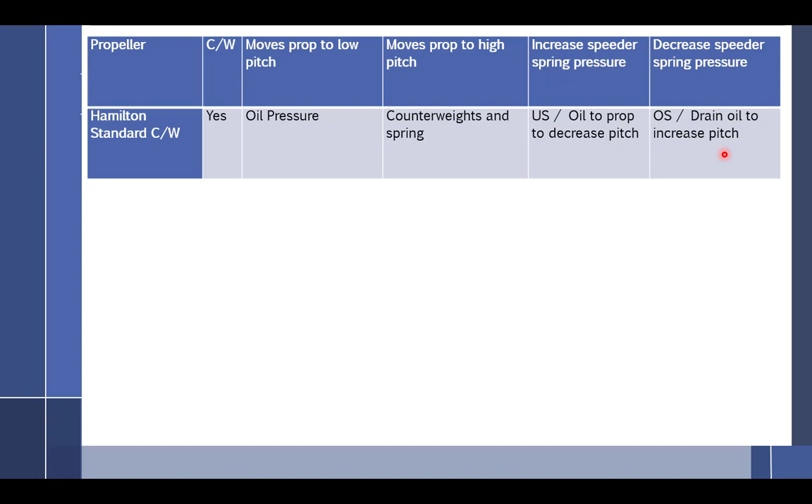All right, next prop we're going to talk about is the McCauley propeller. We're going to talk a lot about different propellers. And I don't really think under any circumstance am I going to ask you something so specific about the McCauley prop did this, where the Hartzell did that. It's mostly going to be a lot of the same.

Does this one have counterweights? No. Doesn't have counterweights. So if it doesn't have counterweights, it's probably going to go on what kind of engine? It's going to go on a single. The fixed force is going to be centrifugal twisting force, and that's going to make the blades go to low pitch. And what is going to make it go to high blade angle? High oil pressure.

We could probably just call it a night, couldn't we? Yeah. All right. You are going to call this out, right? Yeah, but it's going to kind of go through all those until we get all the way down here to that. So there's quite a few. So that's up to you. All right. So there's the inside of it. Are you going to ask about the different hub designs? A little bit, yeah. What he's trying to do is figure out if he can get away with not having to read a bunch of stuff here for his oral, huh?

All right, so here's the inner workings of it. We have bearings along here because we have a lot of force trying to move this propeller out and ripping it out of the hub. What force is that? Centrifugal force. It's a little difficult to see here, but you can see the orange line. The outside, that is the piston dome on top. And inside of it, we have a piston that's going to go back and forth. And as that piston goes back and forth, it's going to be pushing on these phenolic blocks.

Anybody know what phenolic is? Phenolic is something you see a lot in aviation. It's an insulator. It's fibrous, almost like wood, but stronger than wood in some respects. But it's similar to a plastic, if you will. So why all of this metal, and then they put these two plastic pieces in here? When you are actually working with this propeller out in the lab, you will notice that these plastic pieces are in fact broken. So I don't know why it wasn't made out of aluminum. Nobody asked me.

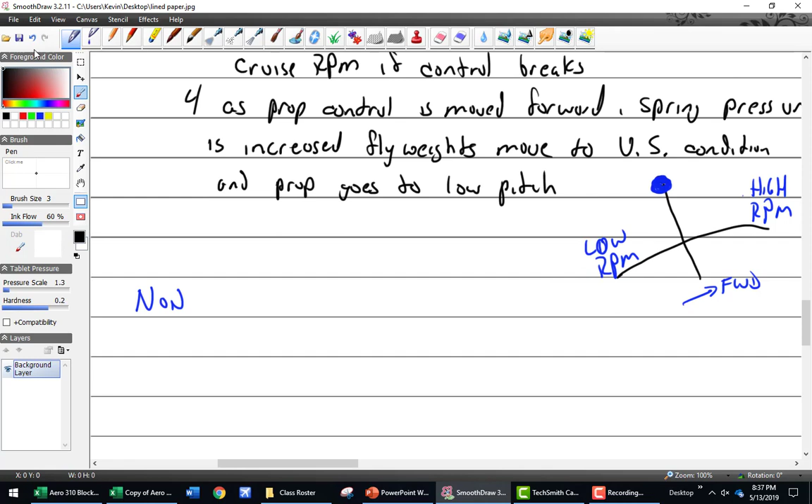All right, so where are we at? 3. I'm going to put a header up here because right now we're going to be talking about non-counterweight, non-feathering props. All right, so everything we're going to talk about until I say otherwise is that.

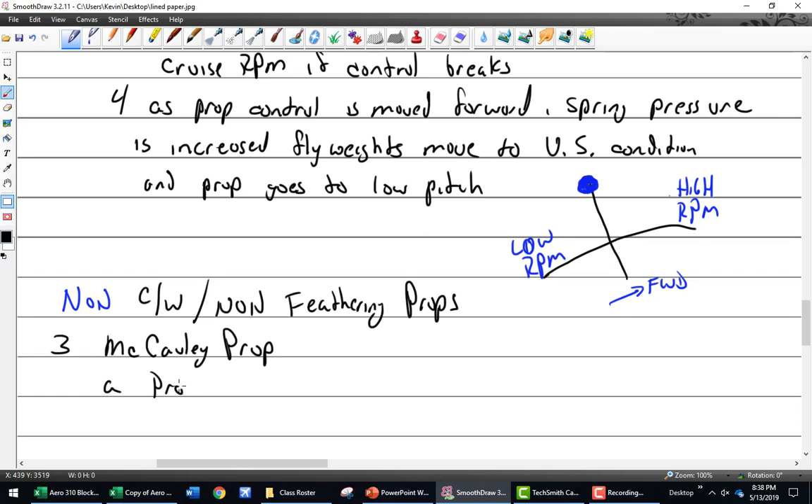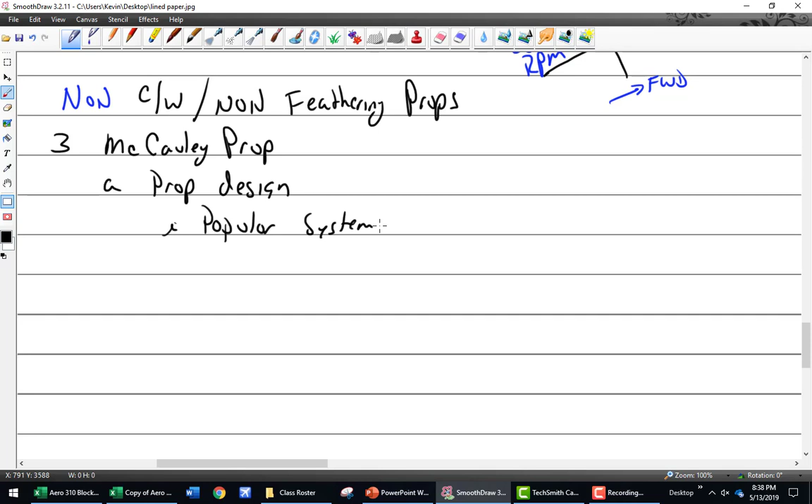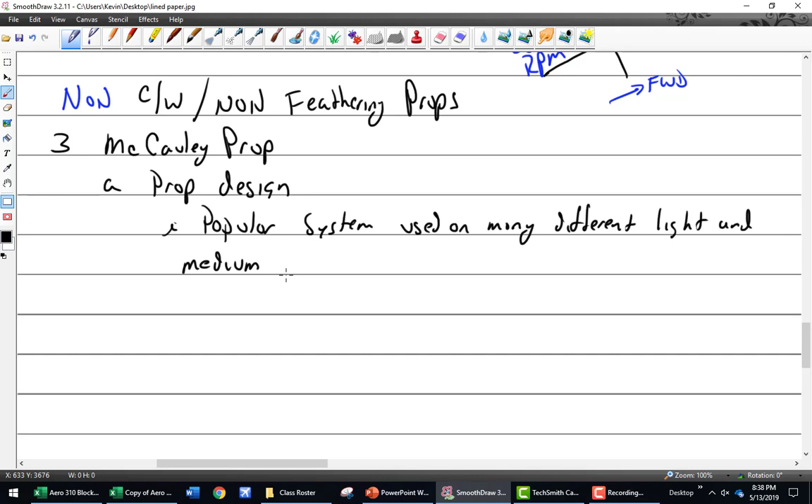This is where it starts to get, for me, scary when you start thinking about buying an aircraft. You can see aircraft for sale, and Tyler can probably speak to this one even better than I can. You can see 2 aircraft that are nearly identical, and the price difference is just off the chart one way and off the chart the other way. And like, why? Why are they so different? A lot of it has to do with radios and instrumentation, but then other things come into play like time since overhaul and then what kind of propeller it has on it, because these things are so dang expensive. So 2 different types.

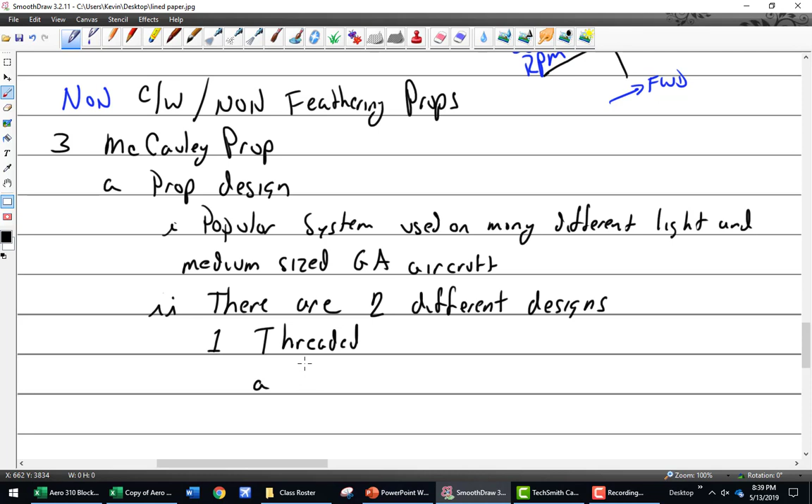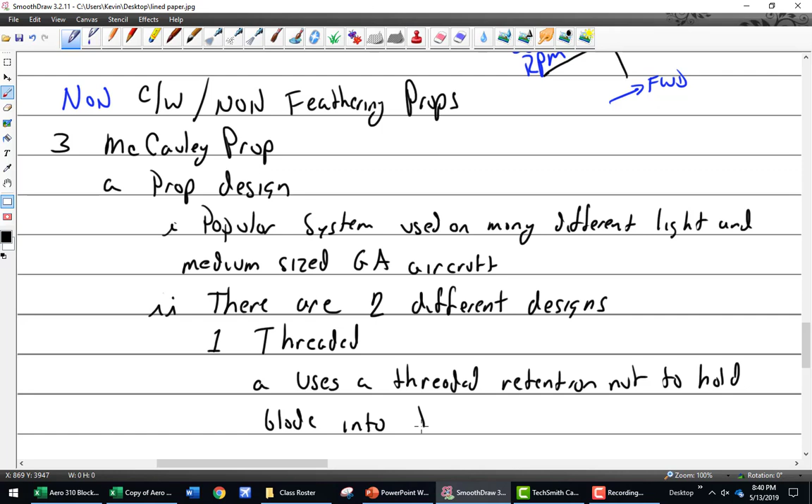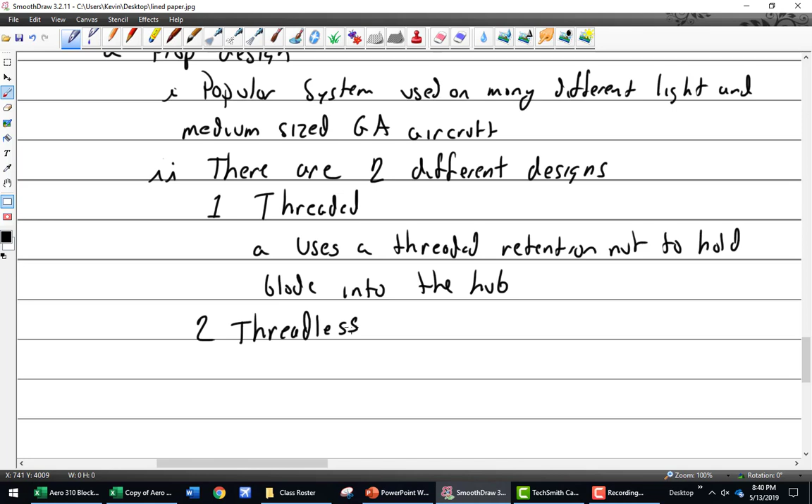There's the threaded type. And the threaded uses a threaded retention nut to hold the blade into the hub. And the other type is the threadless. This is the modern design, with a higher TBO. What's TBO mean? Time between overhaul. And it uses split retainers to hold the blade into the hub.

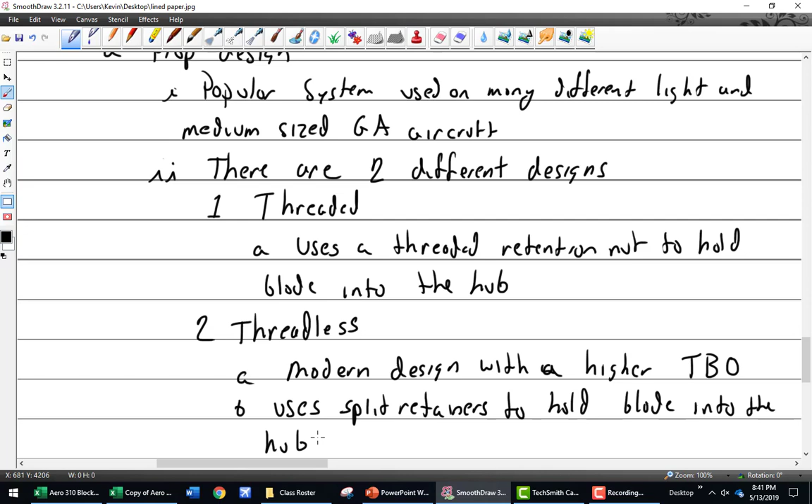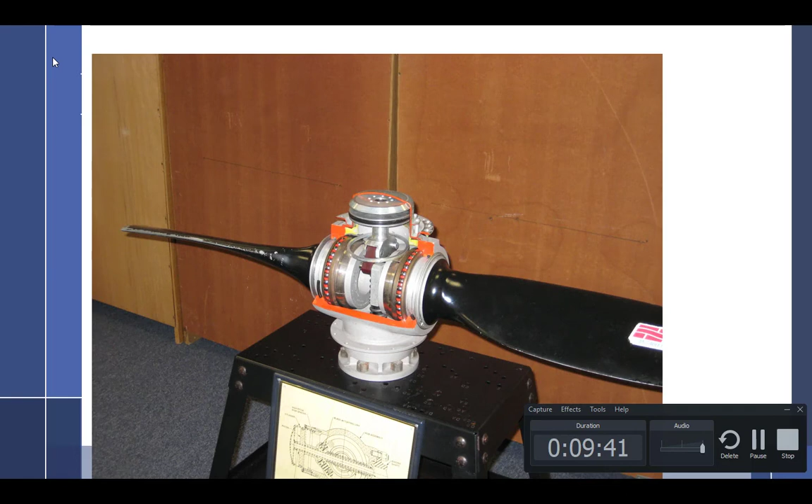Well, let's see if we can take a look. Oops, wrong button. Run current slide. Well, let me see. What do we got here? Well, I see a split retainer, a retaining ring in there. And I don't see any threads at all. So that would tell me that's the modern threadless. All right, let's go back a slide.

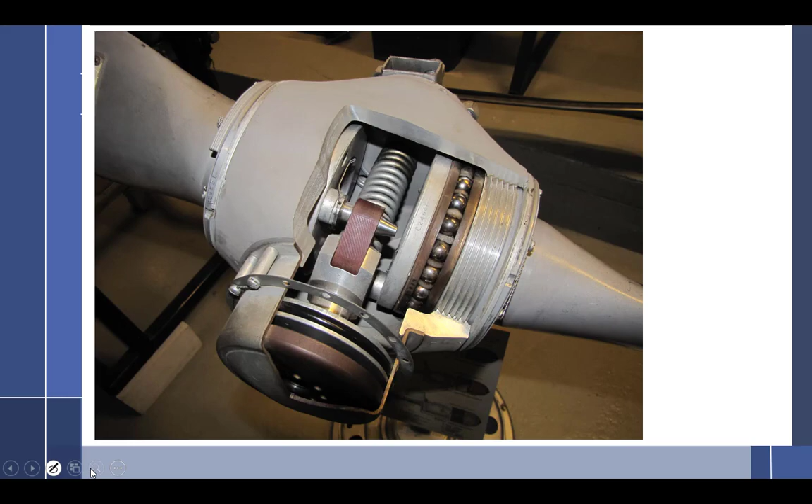Let's see what we got here. Can't really see the side of that one. Ah, there we go. Which kind do you think this is? Hey, what made you think that? All the threads in there. All right, so this is the old style threaded. Here's that phenolic block. Got your bearings. Remember this is where the oil is going to be up in here. It's going to come down the center through that hole right there and fill this area. This area back in here is not full of engine oil.

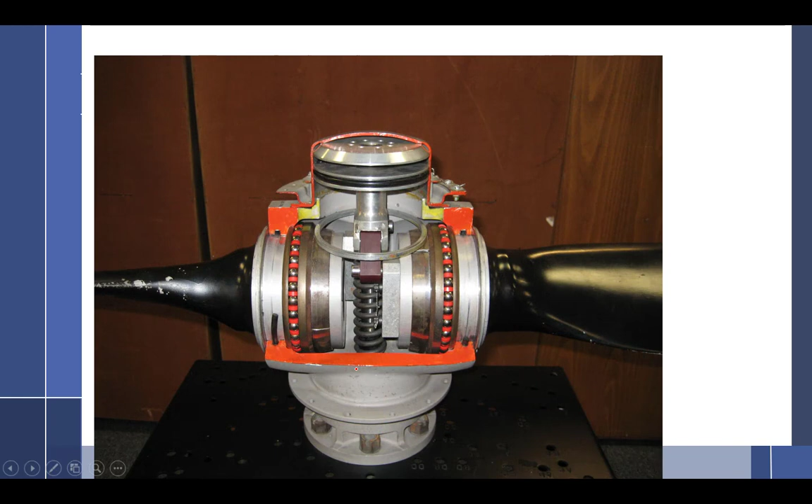I feel like we've already seen this one. What type is that one? Threadless.

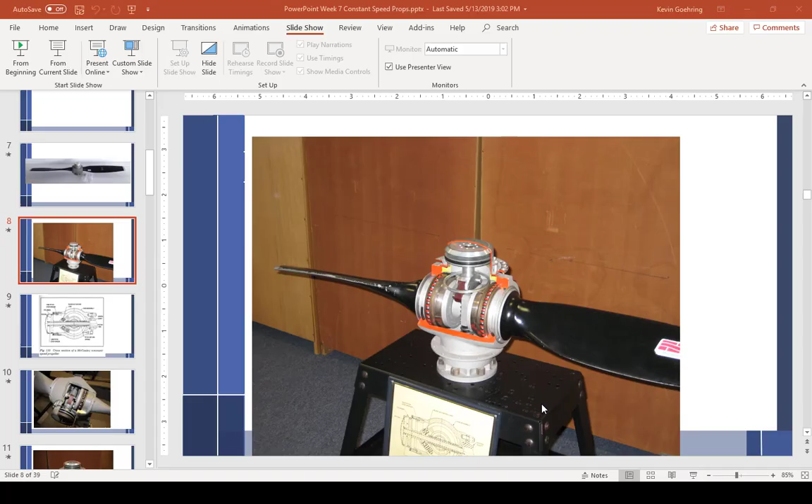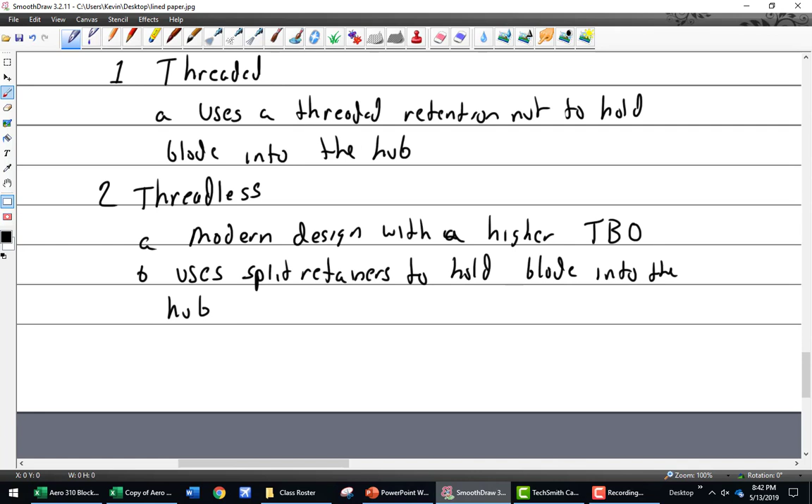All right, I'm going to move this. You all right, Justin? No? Negative. All right, so we're going to... Can you want to do that? Just going to chill out here. Hannah's going to tell us an interesting story while we wait.

I was on this lobster boat before I moved out here because I was like, I'm not gonna be back for a while. Oh, please tell me when you say it was a lobster boat, it was a boat shaped like a big lobster. No, dang it wasn't. But I went out on this lobster boat and I was sailing around. They have these marker buoys, and each lobster crew that's got their license has their own buoy design registered with the state. And so you see some that are blue and yellow stripes or whatever, but the stripes are very coveted, I've been told.

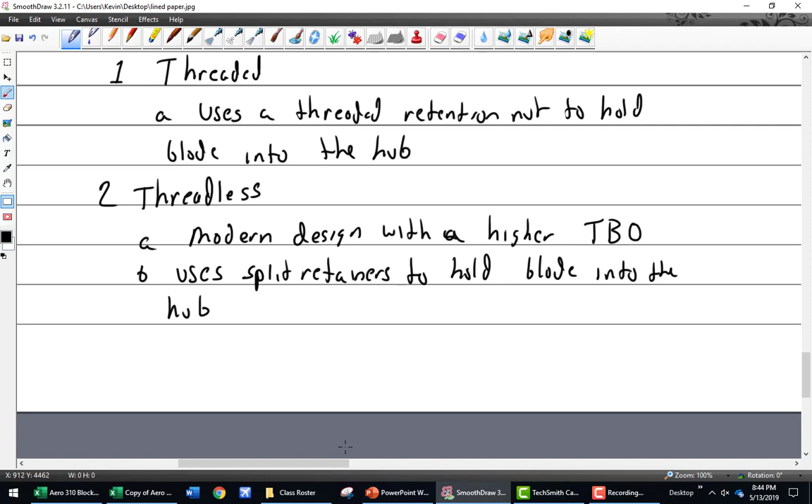But we get to the first crate and they haul it out of the water, and this guy, he's all decked out in his slickers. Slickers, yeah. And he pulls it up on deck and he looks in the cage. He says, "Well, nothing there. Welcome to fishing," and he throws it back in. That was the best story ever.

And boy, if you thought that my lectures were bad.

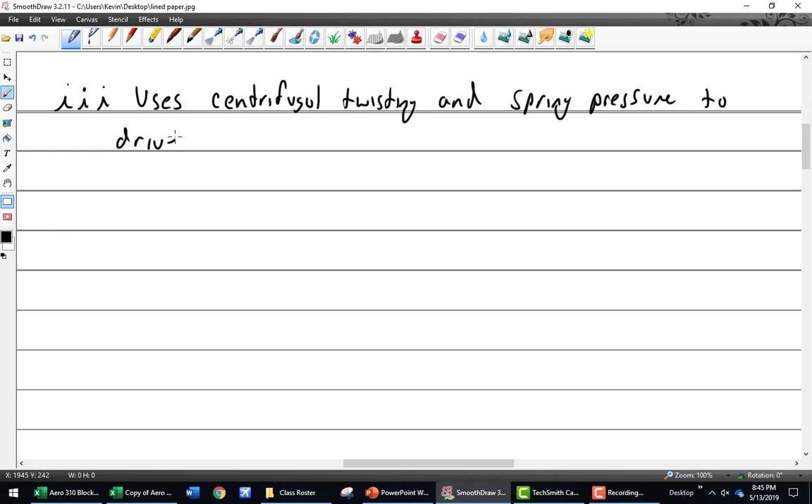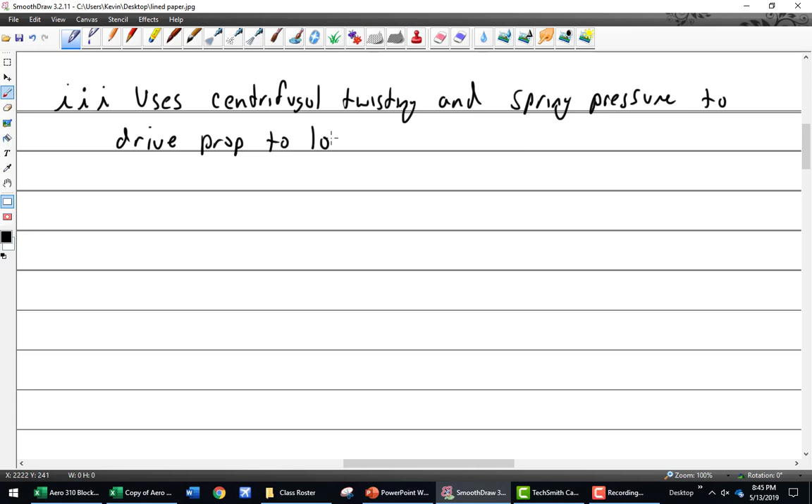All right, so what are my fixed forces? That's what wakes up your students online. Yes. What are my fixed forces? Centrifugal twisting and the spring. Spring pressure to, I use the word drive, I hope that works, drive prop to what? Help me out here. Low pitch. Is pitch the right word? Low blade angle / high RPM. All right.

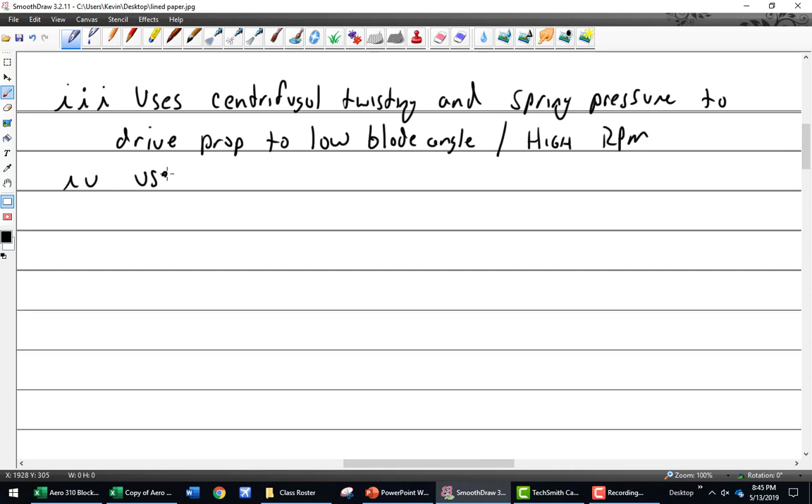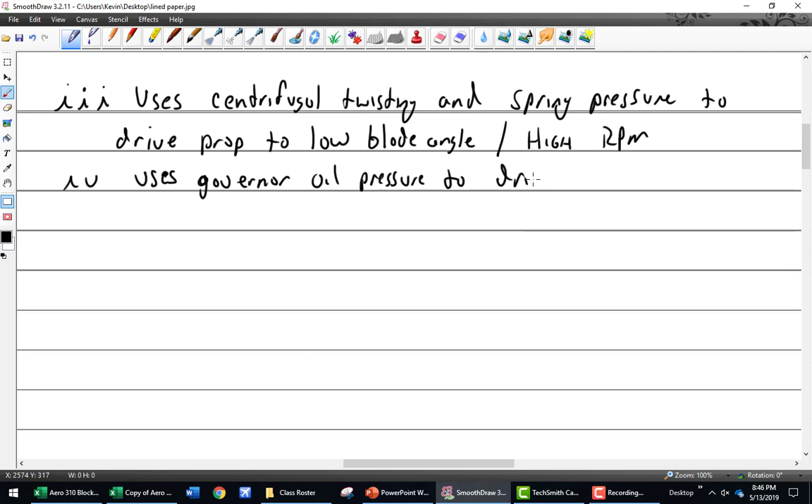That means that it uses governor oil pressure to drive prop to what? All you gotta do is the opposite. High blade angle / low RPM. So if I were to lose this control of the prop, it's going to automatically want to go to low blade angle, high RPM.

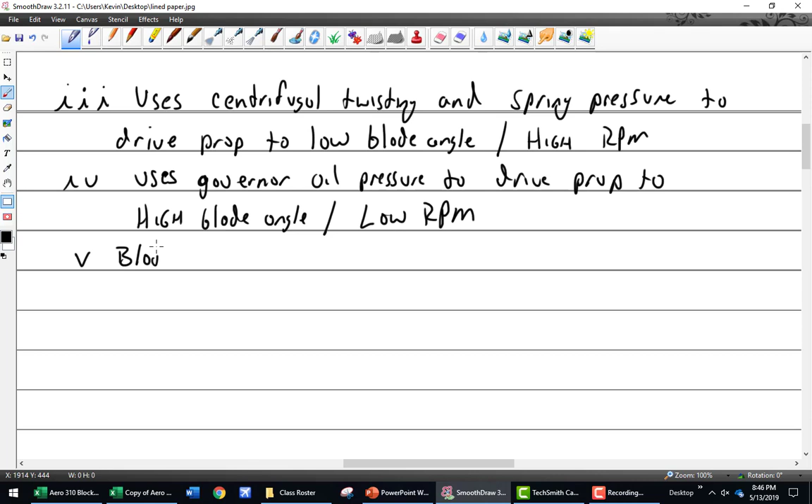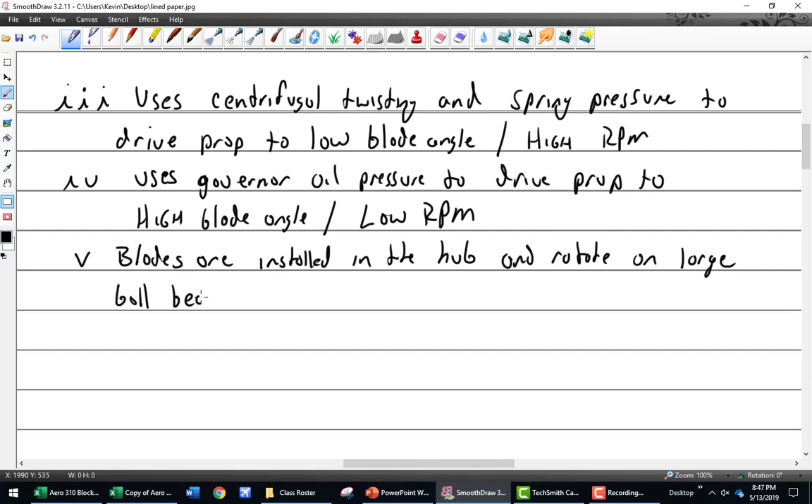Blades are installed into the hub and rotate on large ball bearings. Blades are installed in the hub and rotate on large ball bearings. Oops. I know, that's why I said oops.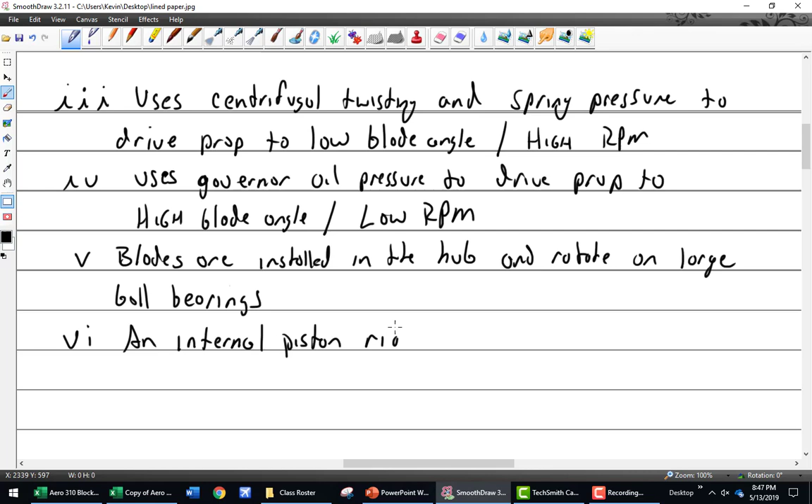An internal piston rides inside of a cylinder. And the piston is connected to the blades through an actuating link. So the piston is connected to the blades via an actuating link. That makes sense. I like that better. It's shorter.

Well, as the piston moves, the blade actuating link rotates. Let me see, a picture's worth way more. So, laser pointer. There's the piston right here, and what's this black thing? O-ring. Yep, O-ring seal, got to keep the oil on the side. So as this moves, the blade actuating link is going to come down through here, and it's going to press on this pin. This pin is on the back side of the blade right here. So this is part of the blade, and as that pushes down, it's not in the center of the blade; it's off to the side of the blade.

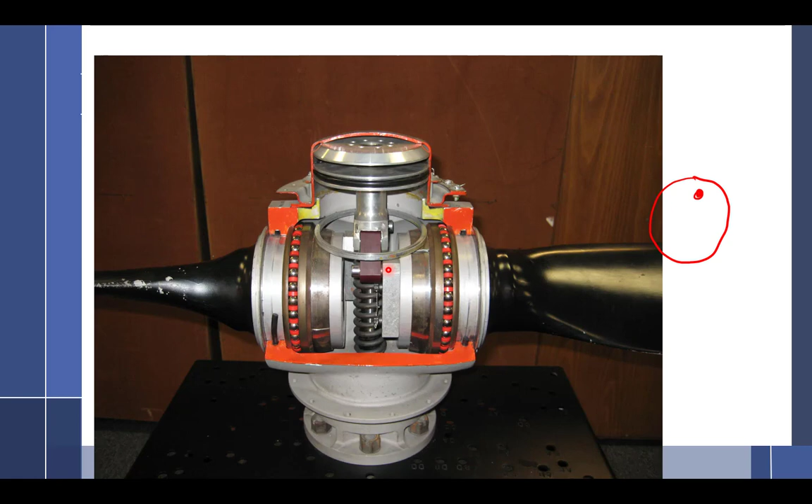Kevin? Yep. Are those rectangles on the end of the blades? Rectangles on the end, oh, right here. Yes. Are those for balancing? No. I'm not sure why they're there. I think there's spacers in there. I don't actually know. Sorry.

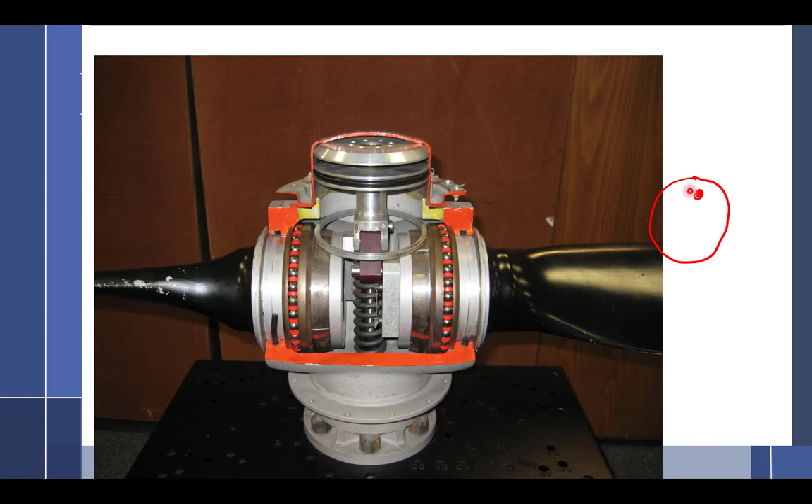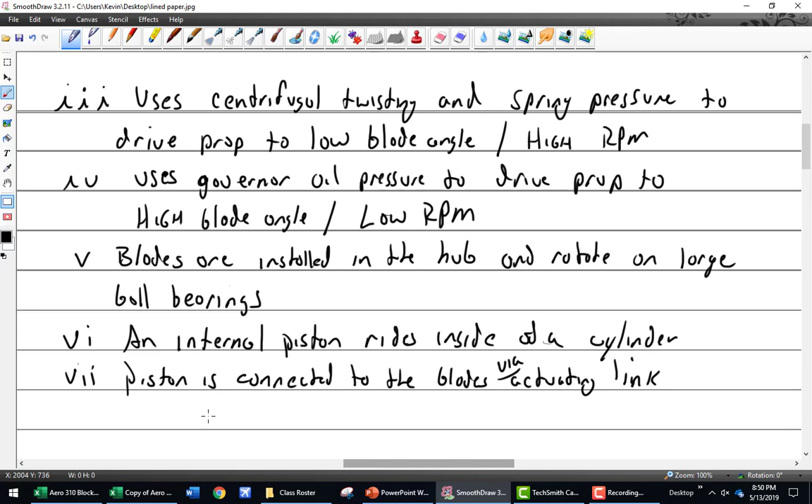But this pin is off center. It's not in the center, it's off center. So when that pushes on that, it rotates the blade back and forth. That's its function. Connected to the blades via an actuating link. As the piston moves, the blade actuating link rotates. A blade actuating pin installed on the butt end of the blade rides inside the actuating link, and as the link rotates, it causes the blade to rotate. Do you want me to write that? All right. Guess I'm getting lazy.

Let's see, high and low pitch stops are internal. So the high and low pitch stops are actually what stop the blade at the high angle and the low angle. So if the stop is internal, it goes to a very flat angle, and I run up the engine and it goes over red line. What do I have to do to correct that? Take it apart? Lose your license. You should be taking apart props in the field? Send it off.

Well, so you're off by a couple RPM. You're going to take it off and send it out and have them open it up? You want to do that? We got to find some other way to adjust the RPM. Can't adjust the blade angle because the stops are internal. Adjust it on your governor? Thank you. Governor stop screw. So as you adjust the governor stop screw, it'll adjust the speeder spring tension. It'll only bring the prop to a certain point.

Now, the thing you have to be careful with: if you're limiting your red line on an internal stop, you have a physical stop and the blade can only go so far. If you're using a governor to stop that, can the blade go a little bit flatter than you wanted it to? Yes. So if you are really fast with the throttle, before the governor can react, that blade's going to go all the way flat. It's already flat. The governor oil pressure hasn't brought it off its stops yet.

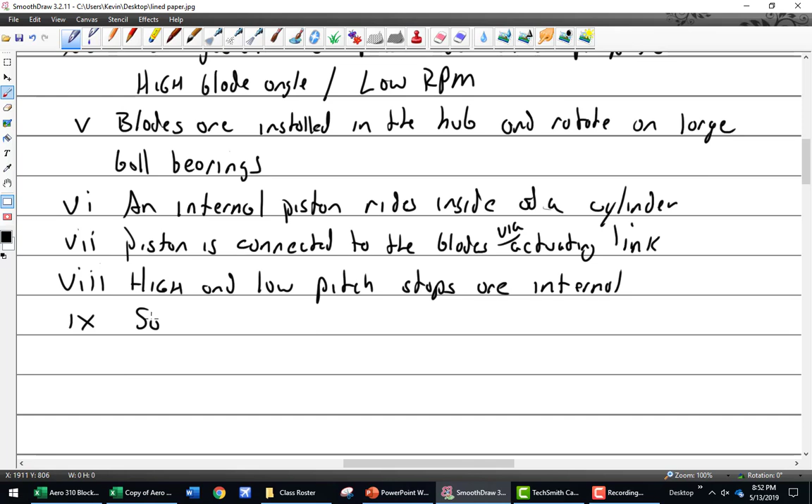Oops, that's that. All right, some props. We're still talking about the McCauley here. Are completely sealed with the exception of spiral pins, exception of venting spiral pins.

And a spiral pin's like a roll pin. Have you guys encountered roll pins on anything? It's really just a hollow pin. It's a hollow pin made out of steel, and it has a split at one point. And the reason for these pins usually is you can drive them into something and they'll close up and fit in a smaller space, and that gives it the tension to stay put.

So sometimes you'll see them driven through a shaft and a castellated nut when the castellated nut is really not supposed to come off normally. But they have these spiral pins. There's two of them. They're stuck in the prop, and they're pretty small, and they give some venting to the inside of the hub. I was going to say that shouldn't be there.

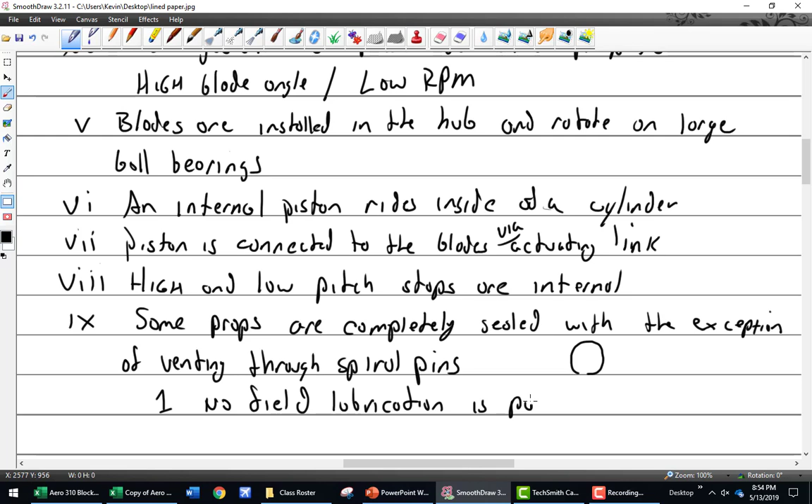If that is the case, and always check your manual, I'm going to say this over and over again, no field lubrication is possible because there's no way to do it. And some props are filled with dyed engine oil.

Why do you suppose they would fill it with dyed engine oil? Or dye pen, for easy inspection. Dye pen, for those who haven't had 300, is dye penetrant inspection. It's a dye that, if there's a crack, is going to seep out of the crack and indicate a crack, because original dye penetrant inspections were actually just done with dirty oil.

So dye leak indicates a crack or failed seal. There we go. And when this is the case, there's almost always a sticker on there that says this hub is internally lubricated with red dyed oil, which is independent of engine lubricating oil system. Best picture I could find, you start to get a little red seep out of there. This could be either a crack or a failed seal. And so that's what you look for.

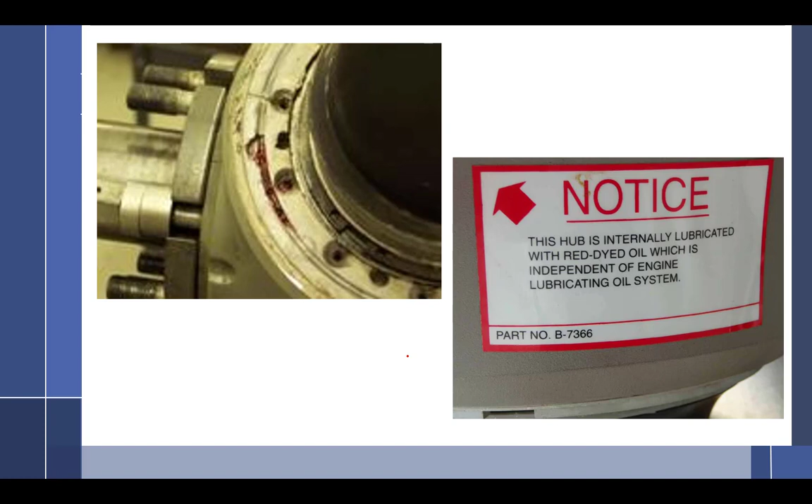Can you explain again what's the danger of over lubricating the propeller? All right. It really doesn't apply to this one, and I'm going to get into it later, but since you're asking, what's the danger of over lubricating your propeller? I've witnessed over time a real change in how propellers were lubricated. When we start getting into some of these other ones, they have grease zerk fittings on them.

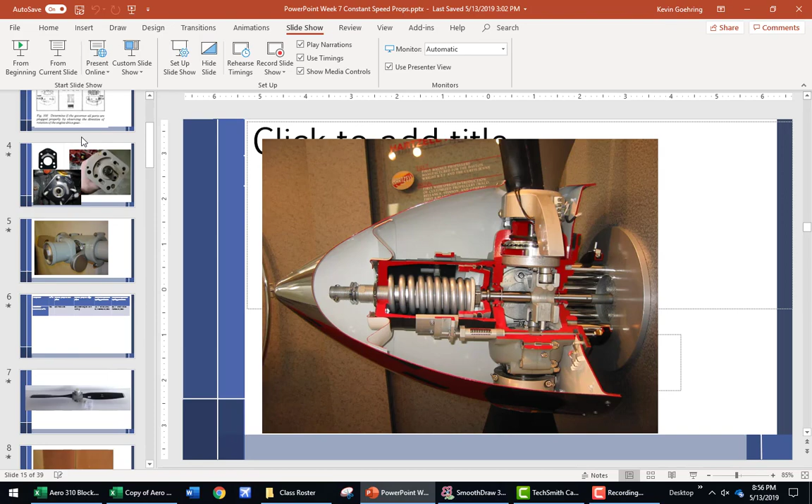Let's see if I can find one here. No, sorry, I don't have good pictures of grease zerk fittings. But we can just use this one as an example. On a lot of propellers, you have these grease zerk fittings, and there's 2 of them, or 4 of them often. One here, and one opposite that on this blade, and then one here, and one opposite that on this blade.

So these grease zerk fittings are designed so that you would grease the propeller. At one point, the procedure was you would take out a grease zerk, let's say this bottom one, and you would put your grease gun on this and pump until you got nice clean grease out of the bottom of the other one. Then you come over here, pull out a grease zerk, and do the same thing.

And that's really changed. I don't see that so much anymore, from what I've been told in the last seminar I went to and some of the newer manuals. They don't want you to do that. What they want you to do, and yeah, you can take out the plug because that vents it, but you only put in like 3 pumps a year.

And the reason why is the prop can only hold so much grease. Once you've filled it full of grease it really has nowhere to go, and this whole idea of flushing it through, they don't want you to do that anymore. The grease stays in the hub, and that's the problem. So you're only supposed to add a little bit.

If you were to actually over-grease the prop, it has to come apart for a clean and reseal. They take it all apart, clean out all the old nasty grease, and of course it's subject to all the service bulletins, airworthiness directives, and everything else. So you have to be very careful, and use the exact right grease called for in the maintenance manual. Sometimes there's even a sticker on it that tells you the exact grease. I can't overstress that greasing a prop can lead to a lot.

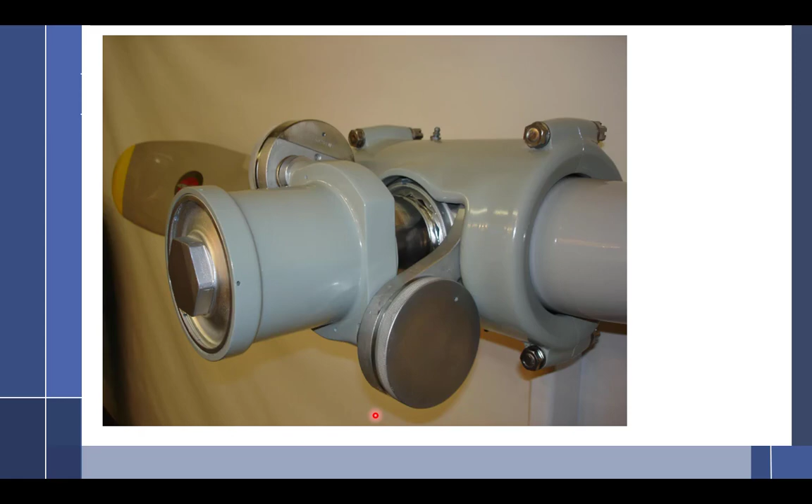You just stretching, or do you have another story to tell? She was going to tell you about the second time she went on. We're saving that for another day.

All right, so dye leak indicates a crack or a failed seal. So if you see red coming out of your prop, then you have a problem.

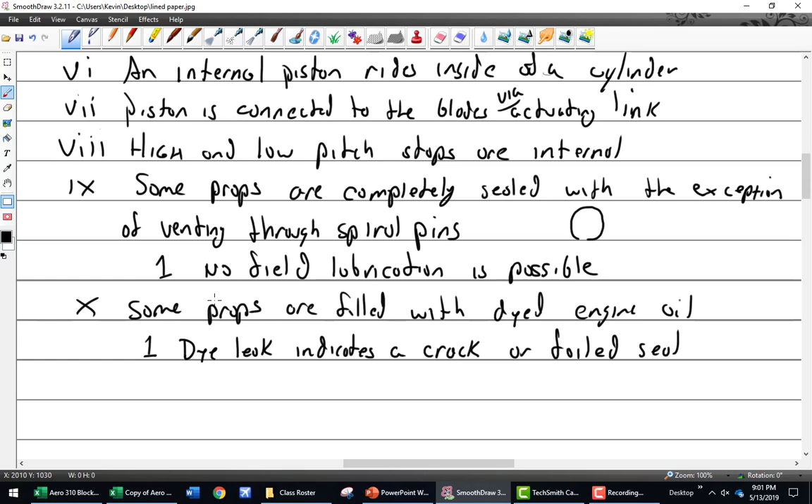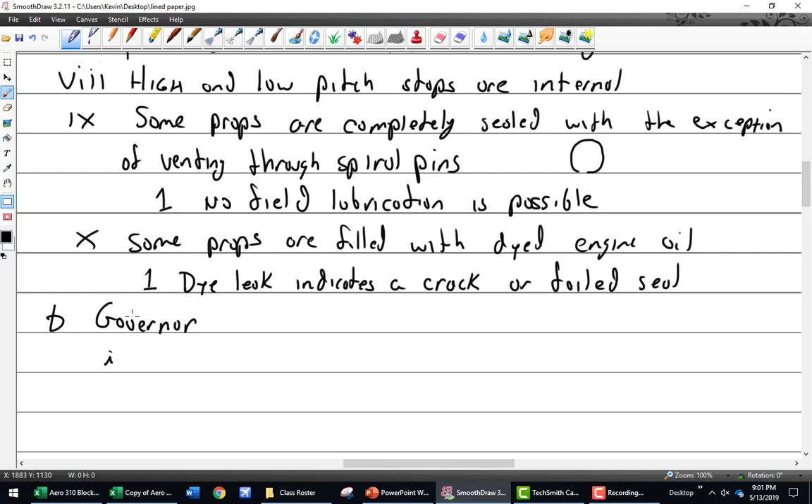All right, let's talk about the governor for this thing. Governor. Well, we talked about the Hamilton Standard. Same as the Hamilton Standard, but works in the opposite manner. I don't think I want to write that. But I write oil pressure is released to, and you fill in the blank, to do what? Decrease the blade angle. Pressure released to decrease blade angle.

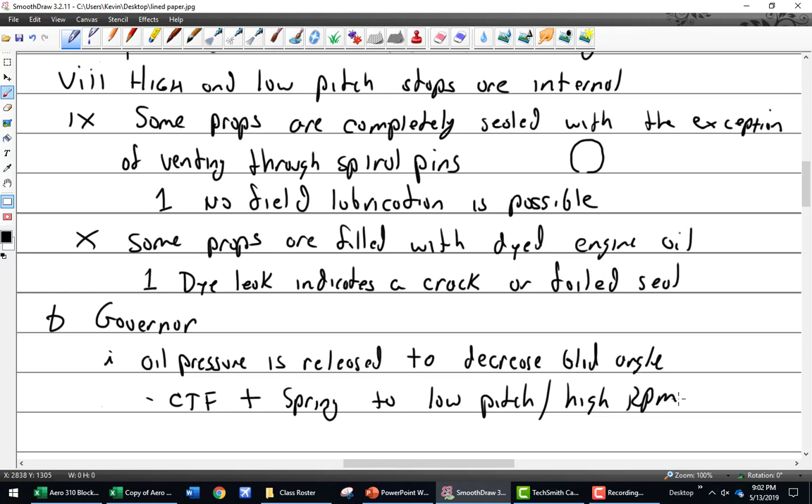Centrifugal twisting force plus spring to low pitch, high RPM. And let me see, oil pressure to prop for high pitch, low RPM.

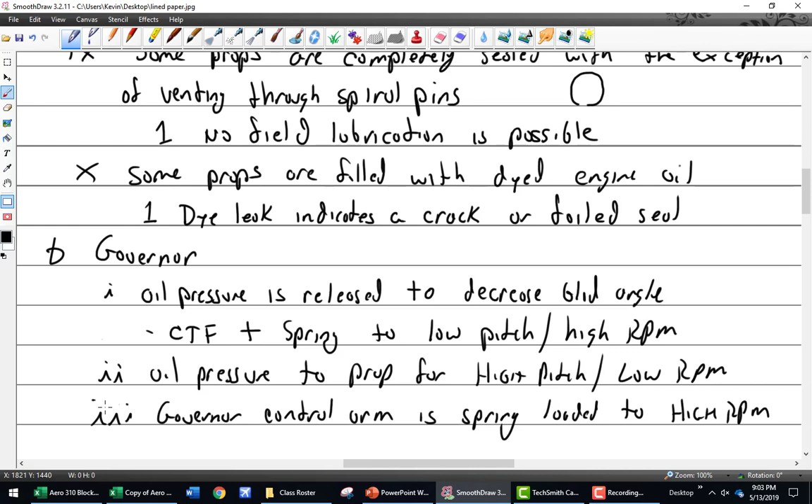Governor control arm. I want to be careful how I write this because the control arm is spring loaded to high RPM. I need a picture. Don't have one. That's just saying that if the control cable from the cockpit to the governor were to break, there's a spring wound on the outside of the governor arm, just like you saw on the throttle on the carburetor, that in case you lost the control, it wants to spring load it to high RPM. Control arm spring loaded to high RPM. So if you lost the control cable, the spring is just going to wind this thing and make it go to high RPM.

Setup and adjustment. I already warned you about taking props off. What's the first thing you need? Bucket. 5-gallon bucket, because you've got to catch the oil and drain the prop. Also, I was reading in this book I was talking about by James Reason, and they were going over...

One of the seminars I went to with the prop shop, they had pictures. Brand new prop was installed in the field, and you already know where I'm going with this. They call up: hey, you guys overhauled my prop, my mechanic put it on, the thing barely works, it's super sluggish. Okay, well, can you bring it in? Yeah, I'm on the field, I'll taxi it, tug it over. They pull the prop off to take it over to the bench to figure out what did we do to it? Why isn't it working?

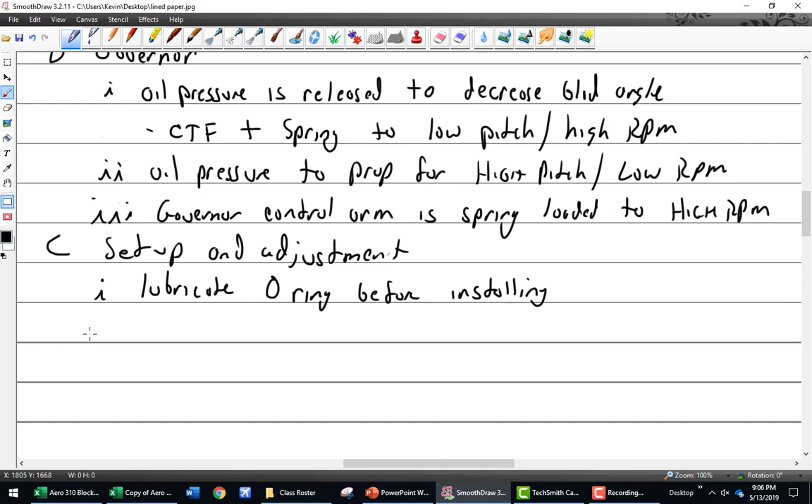So inside of the propeller, there's an O-ring. Make sure there's an O-ring in there. A lot of times it's not in there, it's in a little baggy. And so you lubricate the O-ring before installing. Shouldn't have to say this, but I will. Use proper torque and safety wire. Where am I going to find the proper torque for this propeller? Airframe. The propeller manual. I got propeller manual. Airframe. I got airframe manual.

Engine manual. I was waiting for somebody to say it. I like prop manual the best, followed by airframe, never engine. I don't think I've ever seen that in there. An engine you have to think of as an accessory to the airframe, so those two wouldn't go together. So what if I cannot find it in either the prop manual or the airframe manual? 43-13. Okay, if you can't find it in the airframe or prop manual, look harder. Do not go to 43-13. Not on these constant speeds.

It's there. It's somewhere. And if you absolutely, completely, totally can't find it, call the manufacturer, call the prop shop. Get them to fax you the page. Don't let them tell you what it is. Can you fax me that, please? You know what they're going to say? A what? How about I just email it to you? All right.

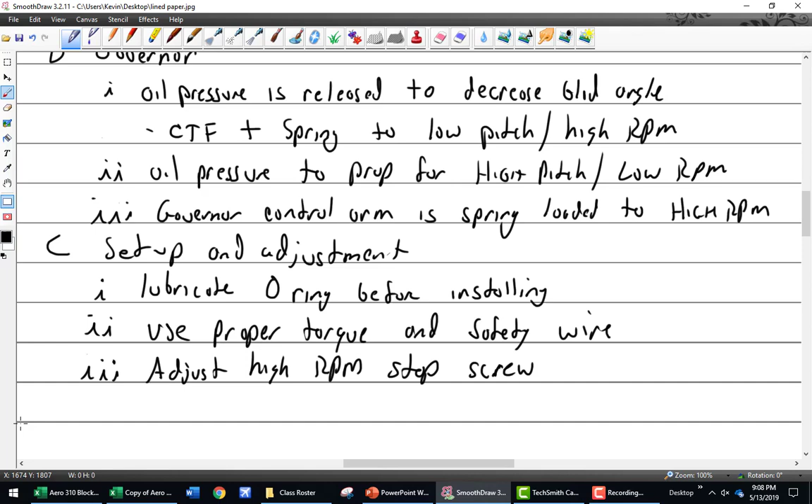Adjust high RPM stop screw. Where am I going to find that high RPM stop screw? On the governor.

Troubleshooting. Pilot says it goes to low blade angle very quickly, but I have a hard time bringing it out of low blade angle. In fact, I've got to have very high RPM on the engine in order to do it, much higher than it used to be. What do you suppose? Sludge. Yeah, it's sludge in the crankshaft. Why sludge in the crankshaft? It's not sending oil. So if it's not sending oil, where does the prop want to be naturally?

Yeah, so that's pretty good. So sludge in there. What about getting wear between the bearing or transfer collar? Again, my explanation was it goes to low pitch, because that's where it wants to be. Very sluggish and won't go to high pitch, and you have to have high RPM. Why would I have to have high RPM? Because I've got to spin the snot out of the governor to get it to work. I need a lot more pressure, I need more volume to go through, so it's not working.

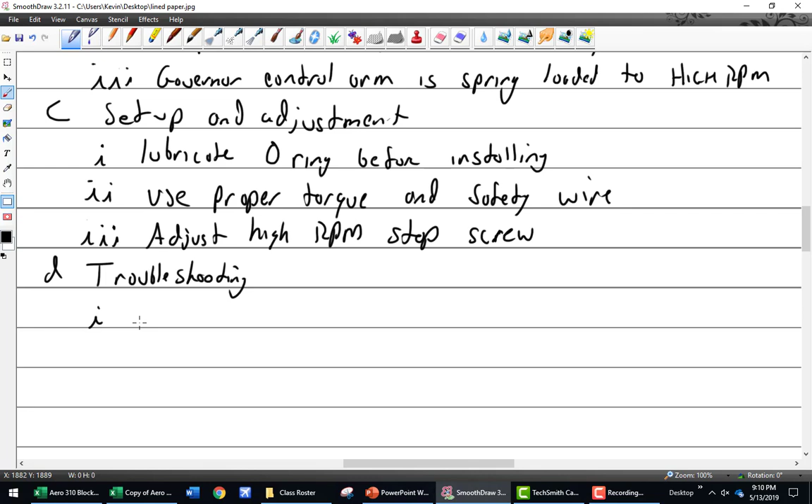So I've got a plug, which was maybe sludge, or low capacity of the oil pump. The governor could be wearing out. But it's kind of funny. All of these things have nothing to do with the prop. So the prop's pretty much got one moving part. Piston goes back and forth, which moves a blade. That's three moving parts. All right.

So just remember: loss of oil pressure will result in low blade angle. It can also be the relief valve. Could be a relief valve problem in the governor. Yep.

You can adjust from... Threaded design has balance weights on the blade retention nuts. So we have to remember that threaded design has balance weights on blade retention. I guess that's just more of a point. And let me see, threadless has balance weights around the cylinder.

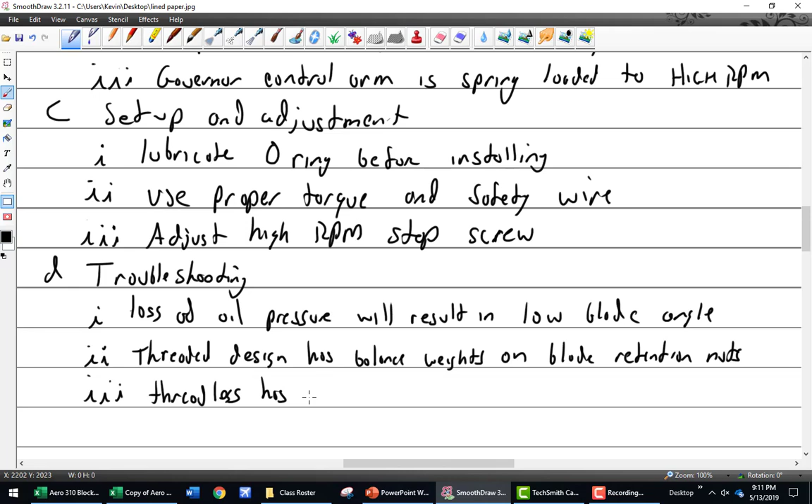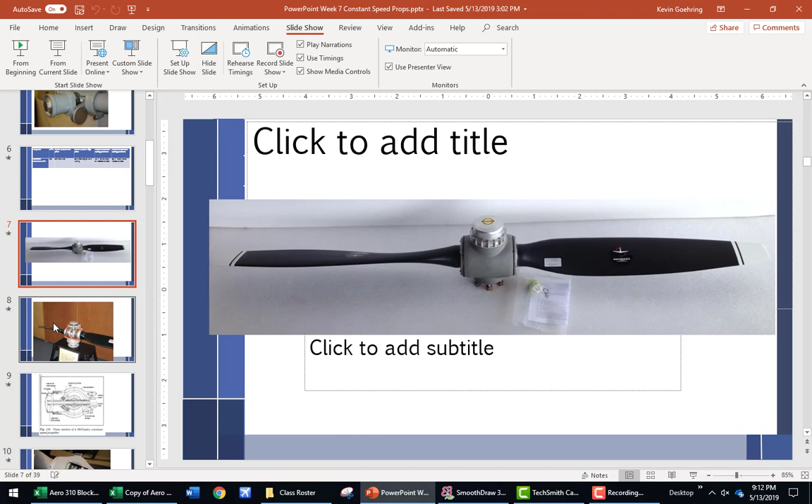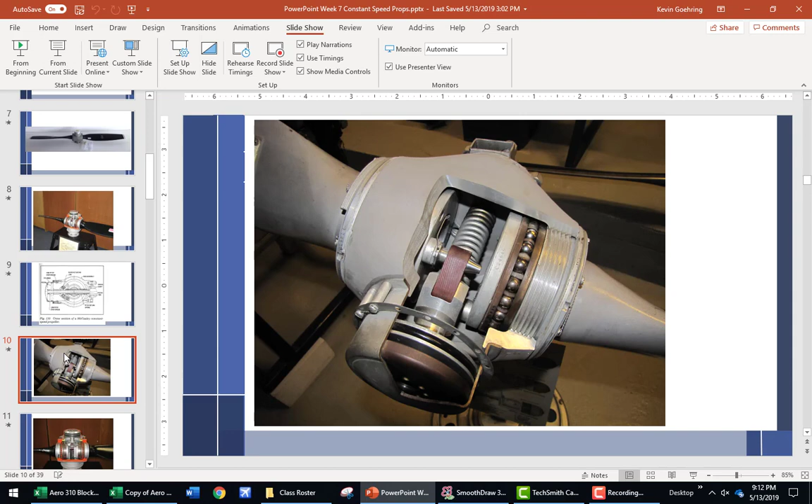So the prop should come to you statically balanced, but you may want to dynamically balance it, which is something that is actually done quite often. And let me see here. I know we've got threaded and threadless. See if we can figure out the threaded design. See those screws right there? So you can attach weights to those screws.

Threadless, no, it doesn't really show up. You'll be looking at it and, for some strange reason, there's two threaded holes, about that far apart, 1.5 inches apart or so. And you wonder why they're like that. And that's why it's like that.

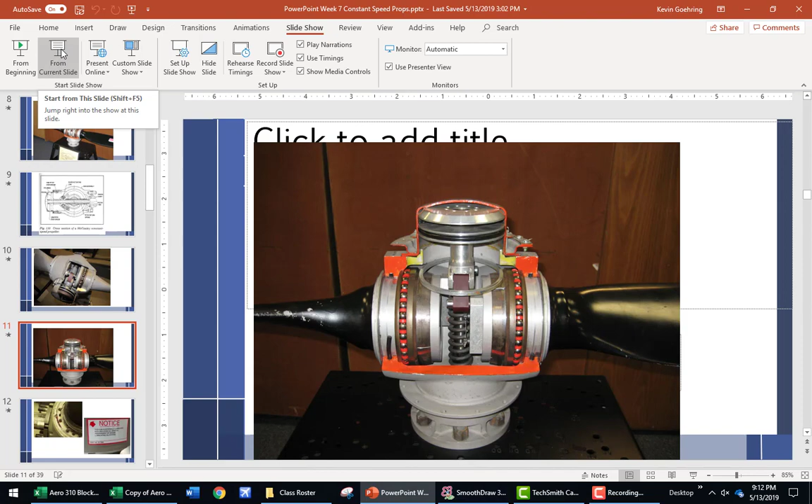These can be a lot of fun, I'm going to tell you, this style, to safety. Some of these, I actually use that pin. I'll have to show you in the lab. But these are castellated nuts with that spiral pin going through it. So it's really just a bolt.

They make it into a bolt, and you have to actually get safety wire through here, up and around and over there. And not only do you have to torque that, but it's a project that I'll let you do in a second here. I kind of set it up, but it's really a pain in the butt, and it takes special wrenches and crow's feet to get in there, and that's all I'll say about that. All right.

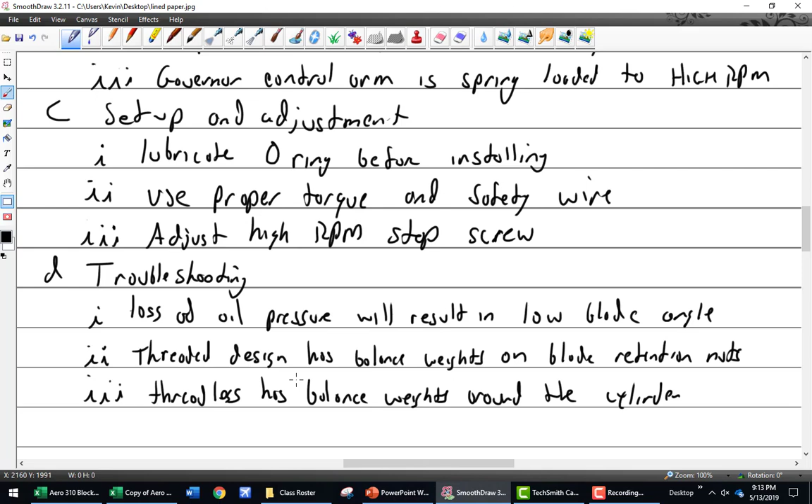So that's the McCauley. McCauley, non-counterweighted, non-feathering. I'm going to spell it so you can actually read my writing. Hartzell. H-A-R-T-Z-E-L-L. Yep. Z-E-L-L. Hartzell props.

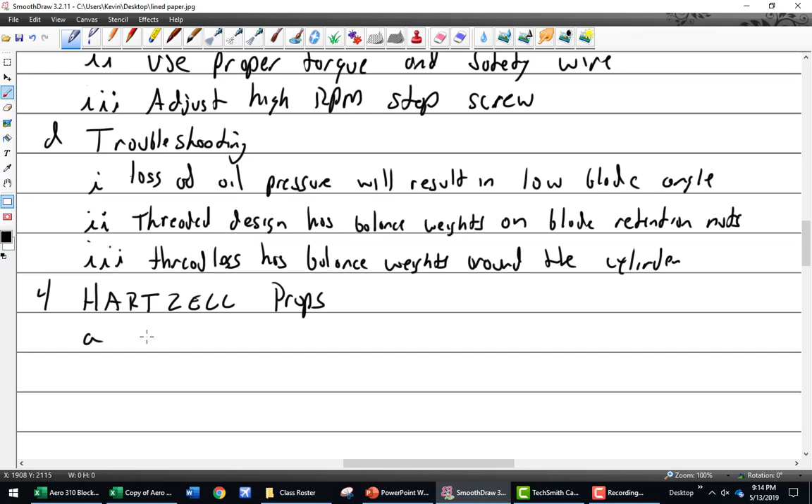All right, prop designs. How many do we have for the McCauley? Two, but they really look very, very similar. So we just had how the blades are retained. But it makes a big deal if you're buying one. Which one do you want, the threaded or the threadless? Threadless, okay. Two types.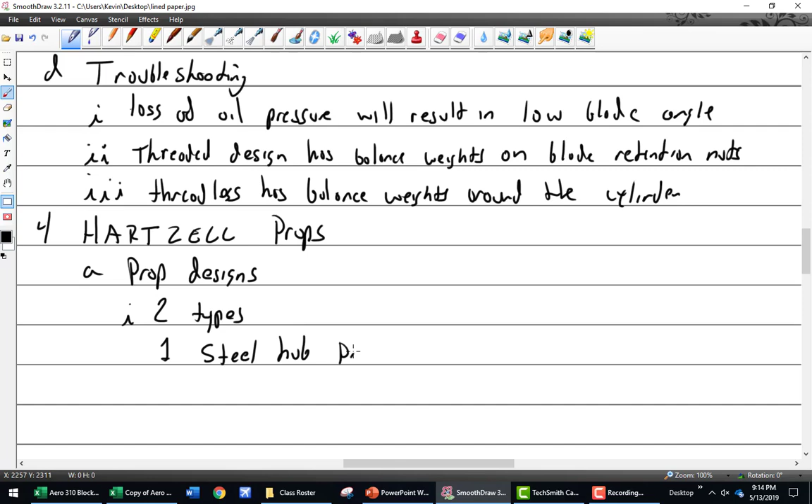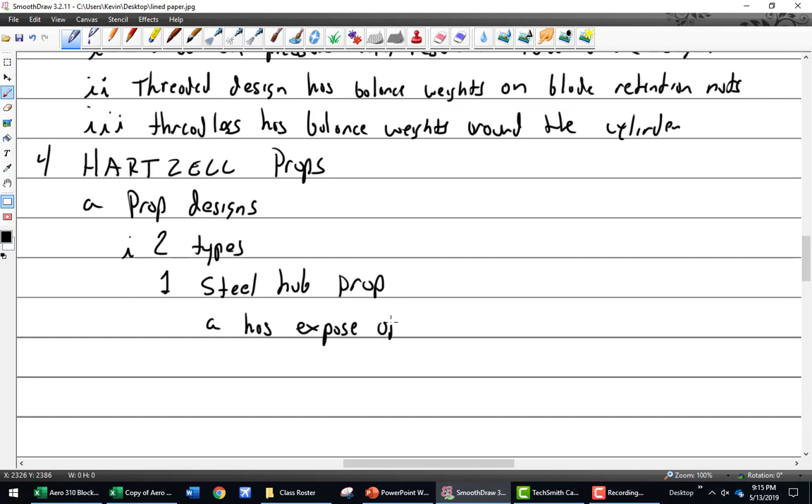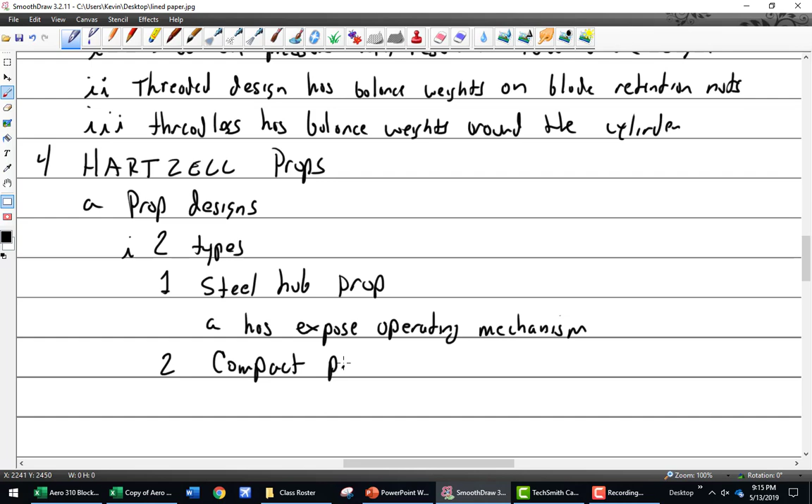We have the steel hub prop. And the steel hub, they're easy to see, has exposed operating mechanisms. Or the compact. And honestly, don't try and figure out which one is the smallest and call it the compact. It's much easier to remember one has exposed operating mechanism, because to me, the compact looks bigger than the steel. The steel actually has a smaller hub on it because everything's external. So the compact has no exposed operating mechanism.

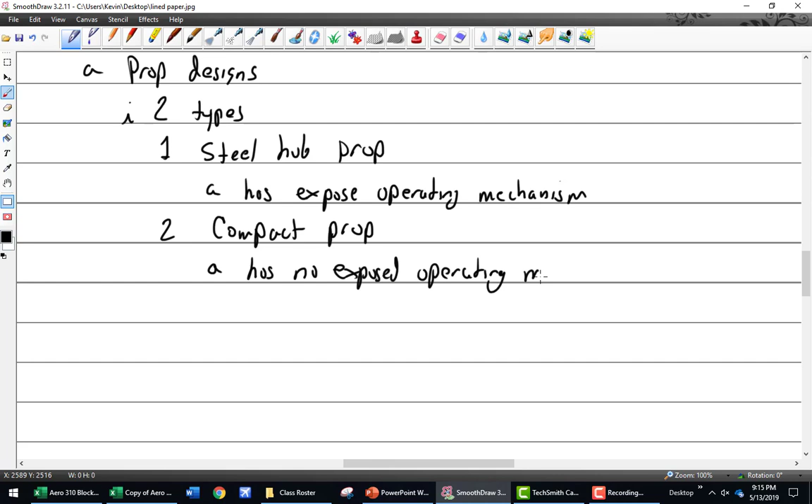Now, let's hope I have a good picture of that, so I can say, see, that's what I meant. Oh, forgot to do that. So let's do that before we move on. So the McCauley. Was this one counterweighted? No, not the one we're talking about so far. So the prop moves to low pitch because of centrifugal twisting and spring pressure. What moves the prop to high pitch? Oil pressure. And then we have the speeder spring.

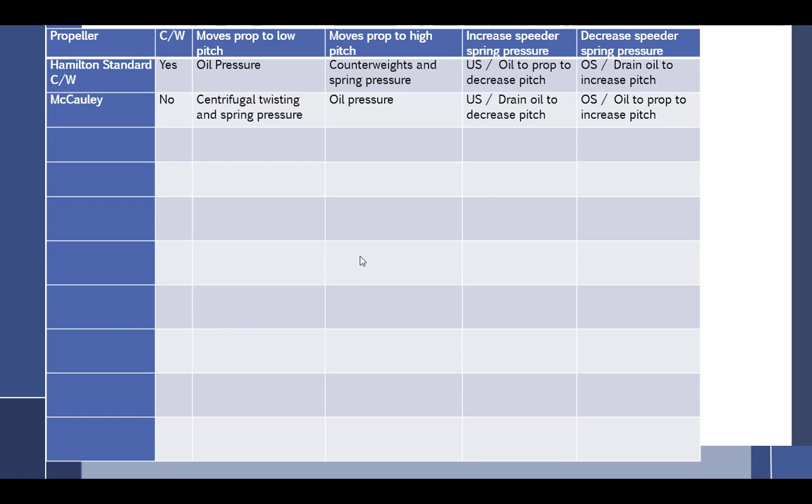Steel hub and compact. See, so the compact, which one looks bigger? Compact. Compact's all fatter, so everything is internal. But then the steel, you can have these rods that come down here, so you can see all the external rods and this moves back and forth. So we have good examples of both of these across the street. So that's why I say look for the exposed operating mechanism. There you've got your steel.

And by the way, you could always look at that, and it's made out of aluminum. And we have very special aluminum steel indicator tools. Christian, you want to talk about those? It's just a magnet, Kevin. It's just a magnet.